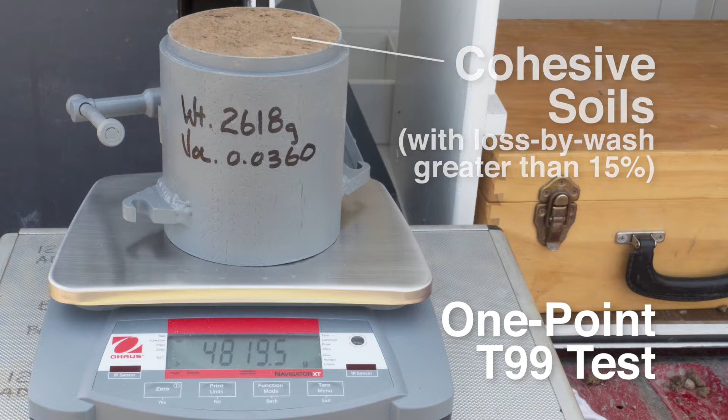The 1-point T-99 test is the primary test used to determine the maximum density of cohesive soils, which we know are those soils which have a loss by wash greater than 15%. This is a Michigan adaptation of the AASHTO T-99 Method C modified test. The modification to the AASHTO test procedure is described in the Michigan Test Method MTM 404.

The 1-point T-99 test uses the following equipment: a Proctor mold with a detachable collar and base plate, the pounding block, a spoon, a 1/4-inch screen, a sample pan, a 1-point T-99 chart, a strike-off bar, water jug, and a 5.5-pound rammer with a 12-inch drop.

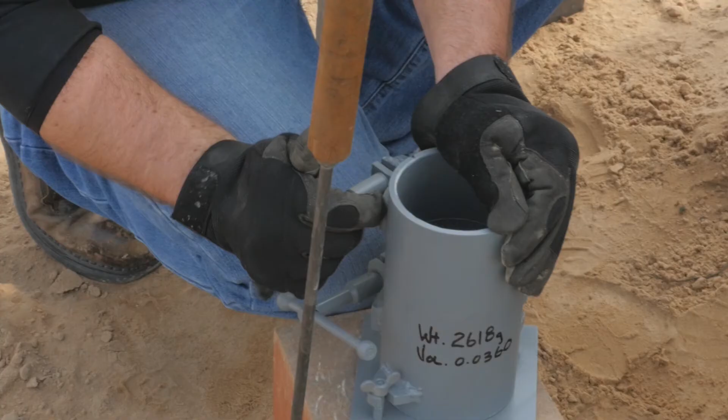The volume and weight of the mold are written on the outside of the mold. On Form 0582B, you will write down the volume of the empty mold in column C. In this case, the volume is 0.0360. In column E, you'll write the weight of the empty mold. In this case, 2,618 grams.

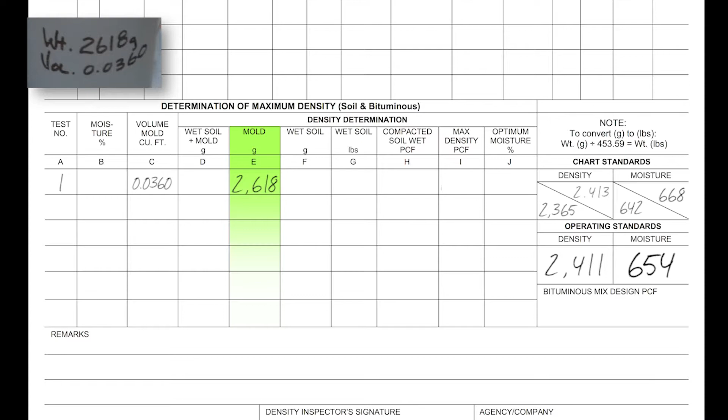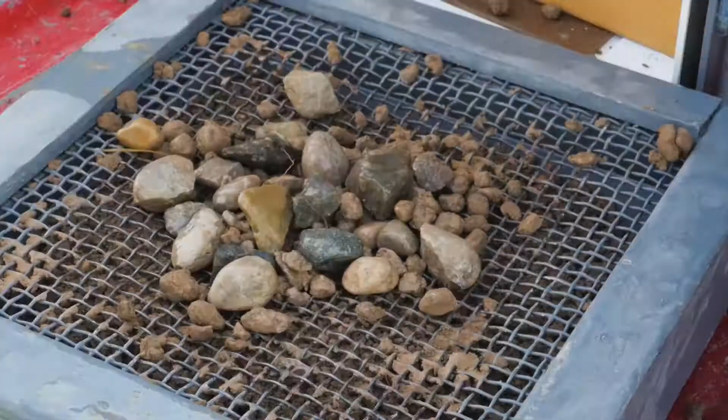The material used for determining the maximum density is taken from beneath the in-place test. Because cohesive soil is normally blocky, it needs to be run through the 1/4-inch screen before the test is run. Any stones left on the screen need to be inspected for size. Stones larger than 1 inch should be discarded and replaced by smaller stones of an equivalent weight. Incorporate the stones less than 1 inch back into the sample and mix it up.

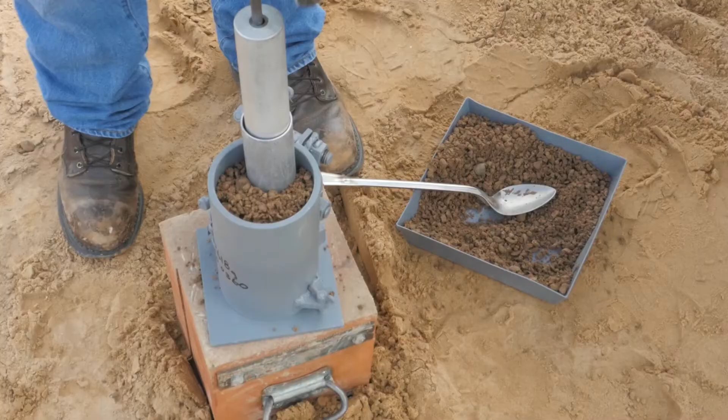Before you start your test, there is something you must remember that is very important. As only one mold will be pounded, it is important that the soil has a moisture content between optimum and 4% below optimum. Optimum moisture is the moisture content at which you can obtain the highest maximum density with a given amount of effort. As you have no idea what the real optimum moisture is before you run the test, there is a simple test that the inspector can use to see if the soil is within the approximate required moisture range.

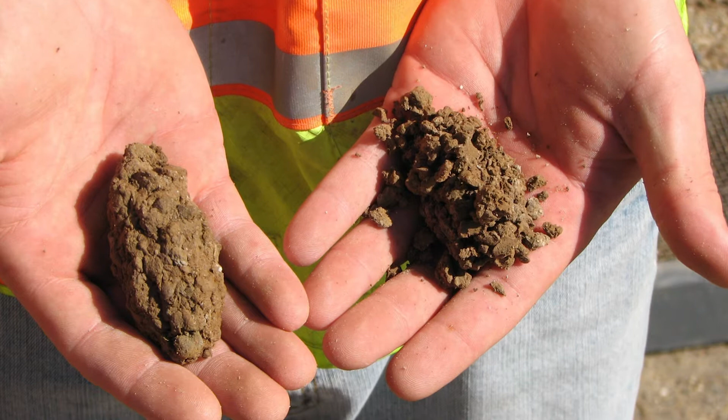Take a handful of material and form a hand cast by squeezing it in your fist. The cast should hold firmly together, but still be able to be broken with a little effort. If the cast crumbles too easily, water should be added to the sample. If the cast molds very easily, like modeling clay, it is too wet and needs to be dried. Whether drying or adding moisture, be certain to screen the soil after to be certain the moisture is well distributed throughout the sample.

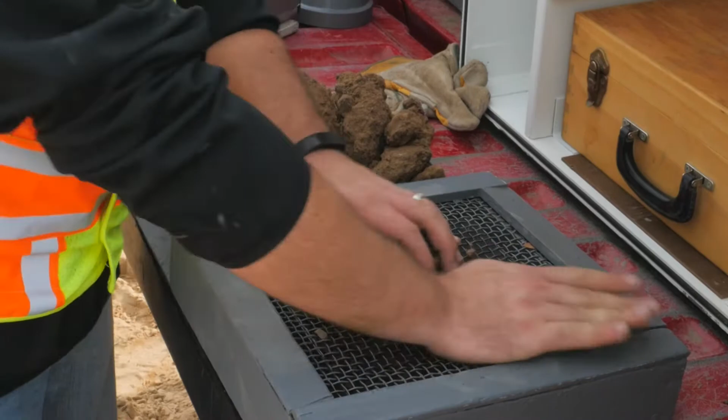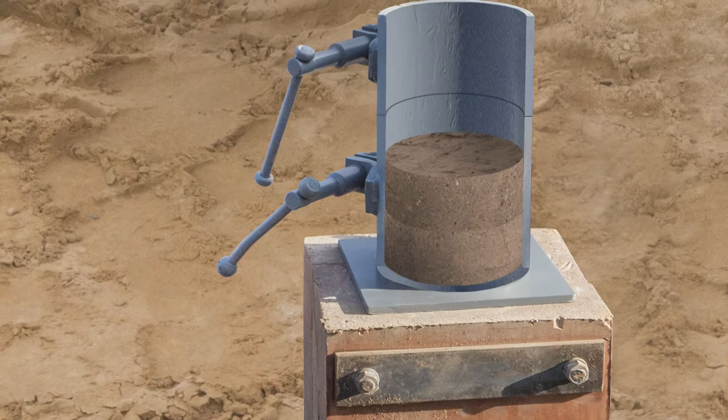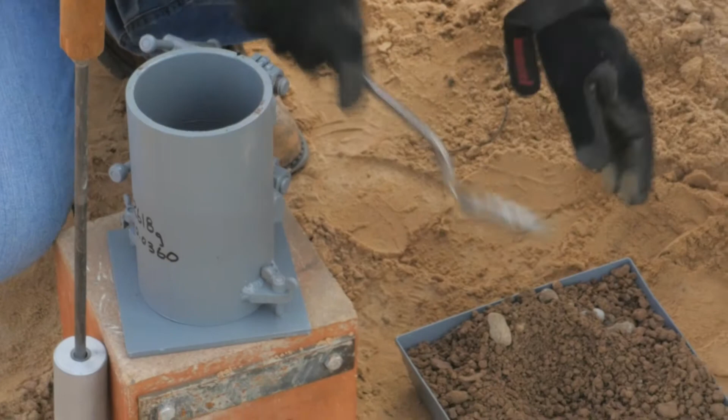Make certain the pounding block is on solid ground. The mold should be tightly screwed to the base plate and the removable collar tightened to the mold. The mold will be filled in 3 equal lifts, with each lift being compacted by 25 blows of the rammer. Put enough material into the mold so it will be 1/3 full after compactive effort. A little field experience will show you approximately how much to use on each lift.

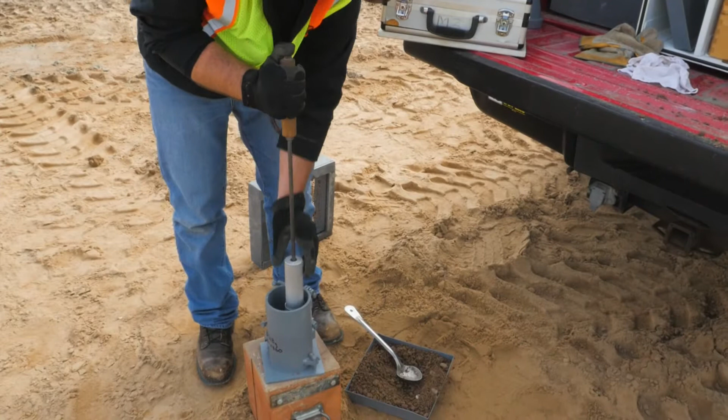Holding the rammer perpendicular to the mold and bringing the sliding weight to the top, allow the weight to freely drop. Repeat this 25 times. Be certain only 25 blows are used. Make sure the 5.5-pound weight falls the full 12 inches. While compacting the soil, the rammer should be moved around the soil surface in the mold to obtain uniform compactive effort on the layer of soil. It is important that the rammer be held straight and the weight dropped freely. Since this is a standard compactive effort, any increase or decrease in the effort may affect the test's accuracy.

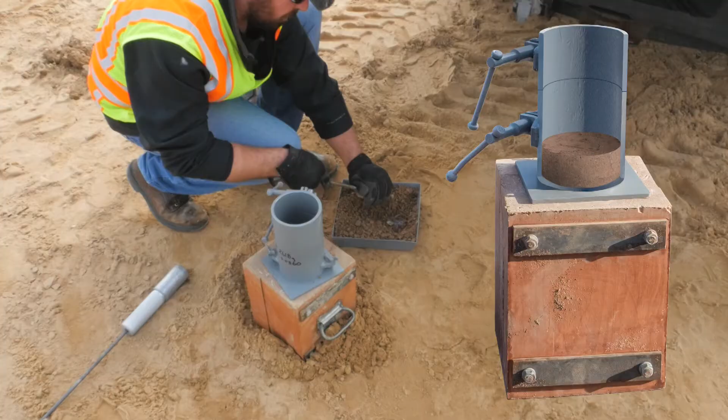A second layer of soil is added, filling another 1/3 of the mold's volume after compaction. This is also compacted by 25 evenly distributed blows. The third and final layer is then added, including enough soil to extend above the mold a 1/4 inch to a 1/2 inch after 25 compactive blows. This graphic illustration gives an idea of the appearance of layers, compacted by 25 blows per layer for a total of 75 blows.

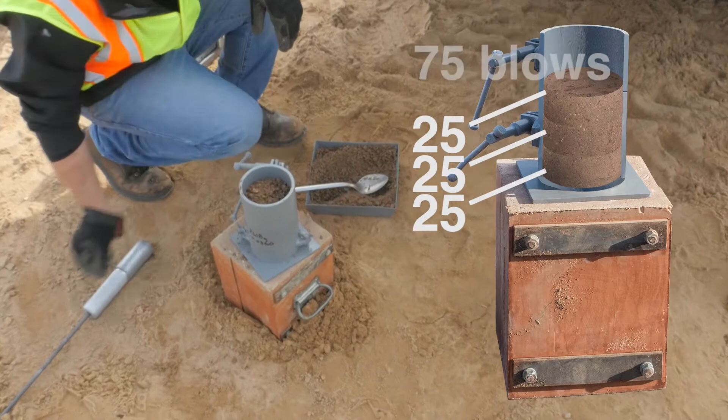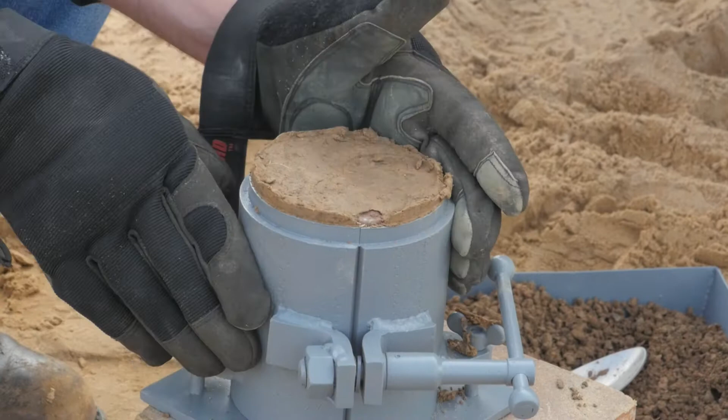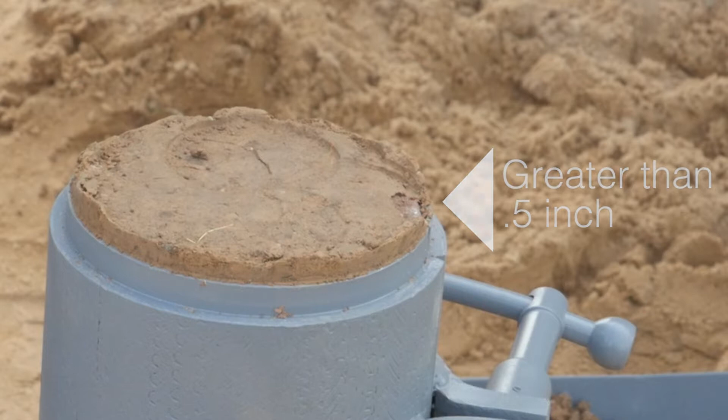When removing the collar, loosen the bolt and twist the collar before lifting straight up. This will prevent you from accidentally pulling off the last layer. After removing the collar, you want the soil to extend out of the mold a 1/4 inch to 1/2 inch. If you are too low when finished, you must start over. If the material is above the 1/2 inch, you may use the mold for this test if you are pressed for time, but you must do another at your next in-place test location.

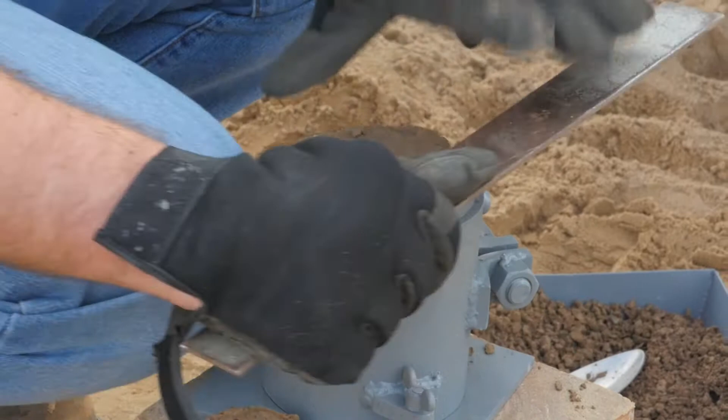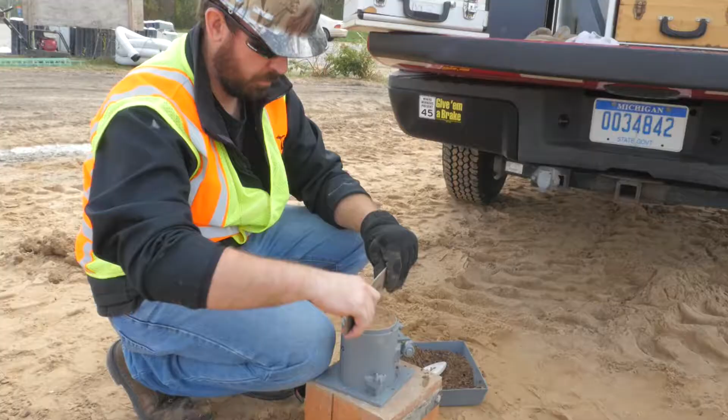The soil is then struck off with the strike-off bar. Don't try to cut the soil off with only one cut. Shave around the edges and work towards the middle. To keep from bending down, you may move the mold to the tailgate of your truck when using the strike-off bar. When you think you're close, use the sharp edge of the strike-off bar and make an X on the top of the mold. If you can see lines, keep working at it.

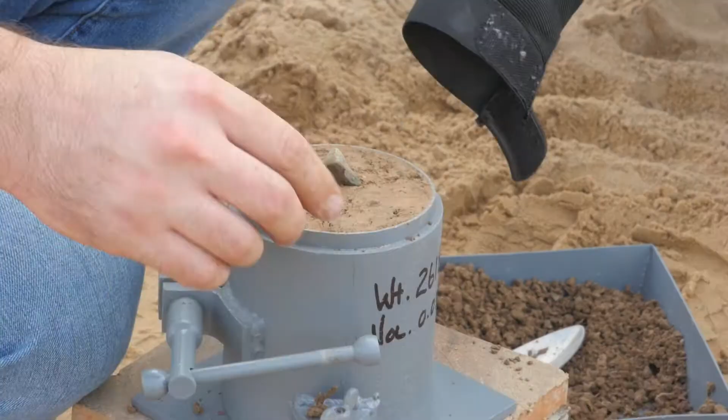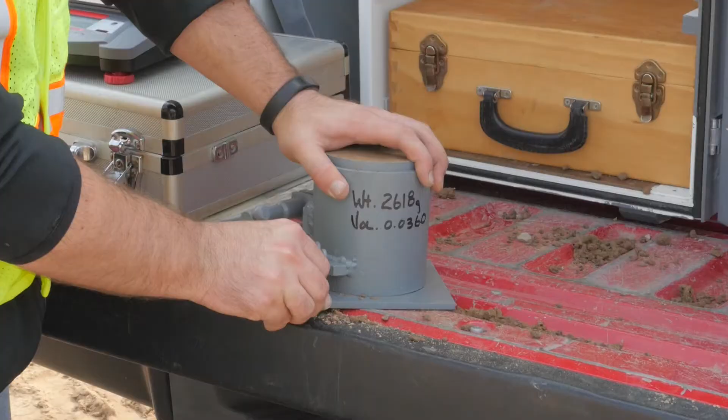If you encounter a stone that is sticking out slightly, use the blunt end of the strike-off bar and pound the stone into the soil the rest of the way. If you encounter a stone that is sticking out more than halfway, remove the stone and replace the void with the fine soil shavings that you just shaved off. This is showing what the mold should look like after you're done. It should be relatively free of voids, smooth, and even.

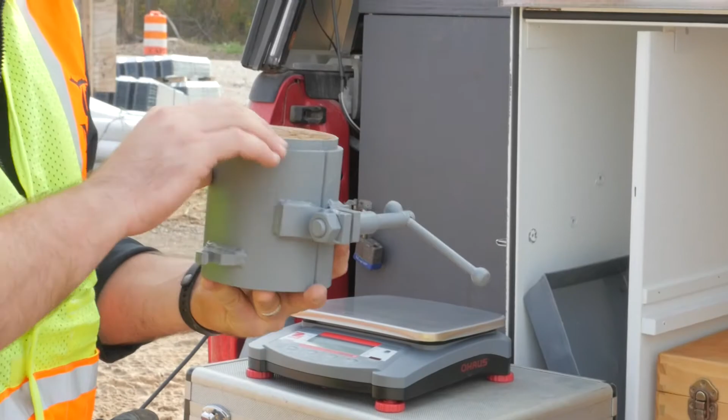Remove the mold from the base plate and weigh the sample on the scale. Make sure your scale is level and the mold is centered, and record to the nearest gram on form 0582B. Complete computations through column H, compacted soil wet.

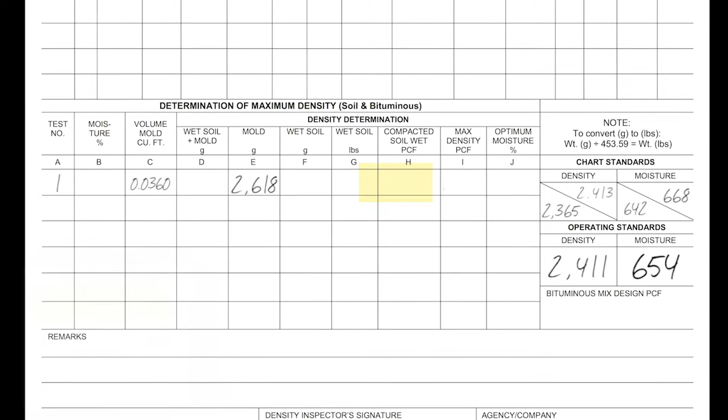First we subtract the weight of the mold in column E from the weight of wet soil plus the mold in column D. The result is recorded in column F, wet soil. In this example, 4,820 grams, wet soil plus mold, minus 2,618 grams, the mold, equals 2,202 grams, wet soil.

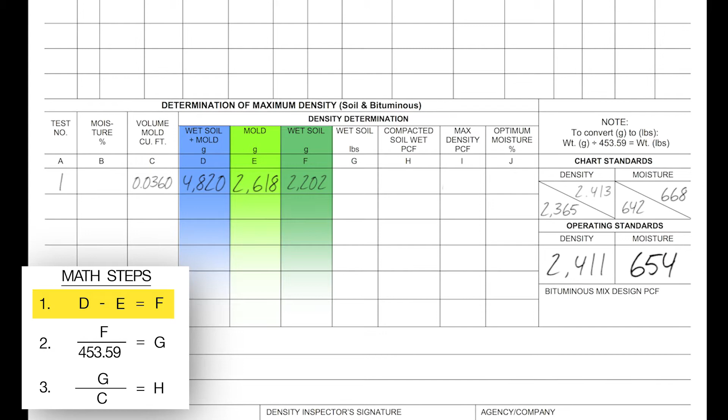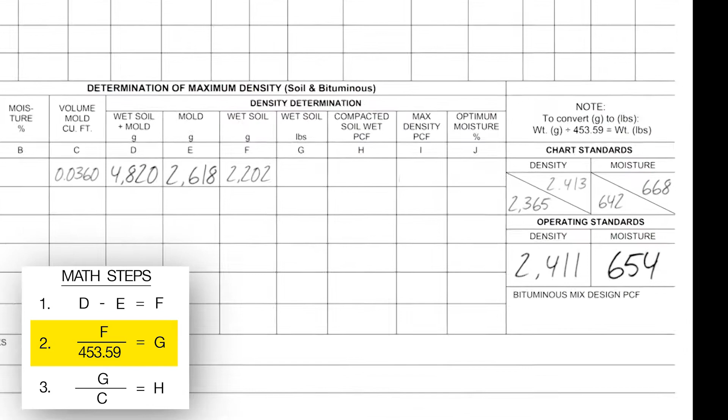Next we convert the wet soil weight in grams, column F, to pounds by dividing by 453.59. Formula located under Note on the lower right side of form 0582B, and record in column G, wet soil in pounds, to the nearest hundredth. In this example, 2,202 wet soil in grams divided by 453.59 equals 4.85, the wet soil in pounds.

Then take the wet soil in pounds, column G, and divide by the volume of the mold, column C, to get the compacted soil wet, PCF, in column H. Record to the nearest tenth. In this example, 4.85, the wet soil in pounds, divided by 0.0360, the volume of the mold, equals 134.7.

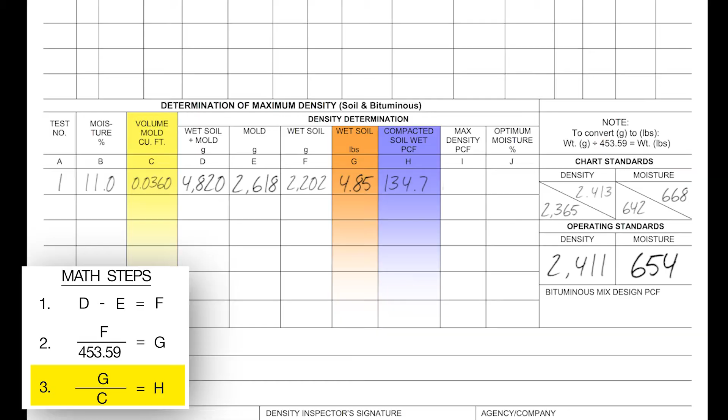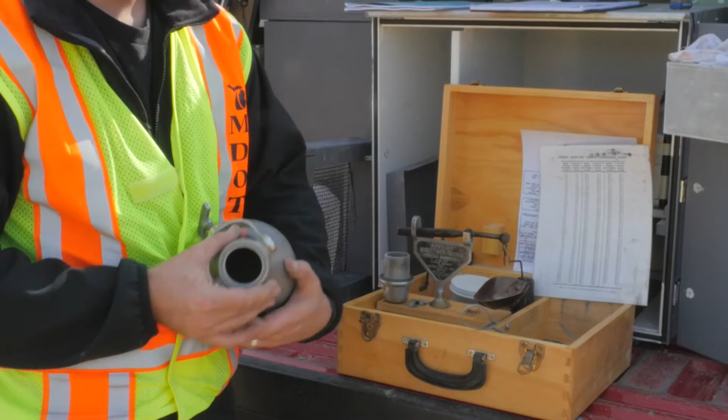If the material has been manipulated, the speedy is required to figure out the moisture percentage. When going through the speedy test, gently roll in the steel balls. Loosen the mold to remove the sample. After removing the sample from the mold, the sample can be broken into 3 equal layers. Use the center portion to get a sample from. Cut the center portion into a pie shape and run enough material through the screen to obtain a moisture sample.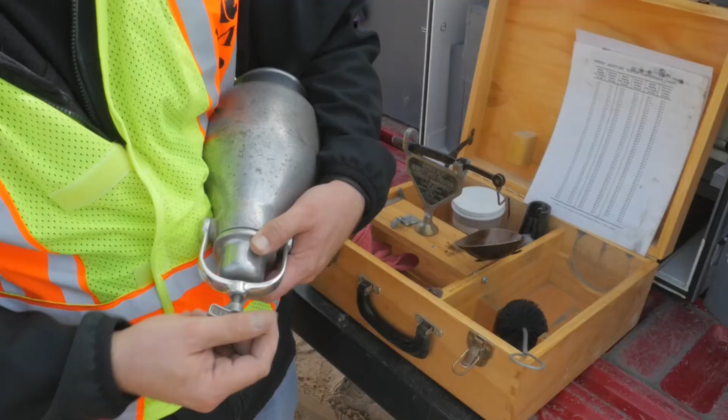As this is a cohesive soil, or a soil with a loss by wash of greater than 15%, we will use a half sample. After tightening the top screw, rotate and read until the needle stops moving. By definition, the needle stops moving when you have 3 consecutive readings that are the same.

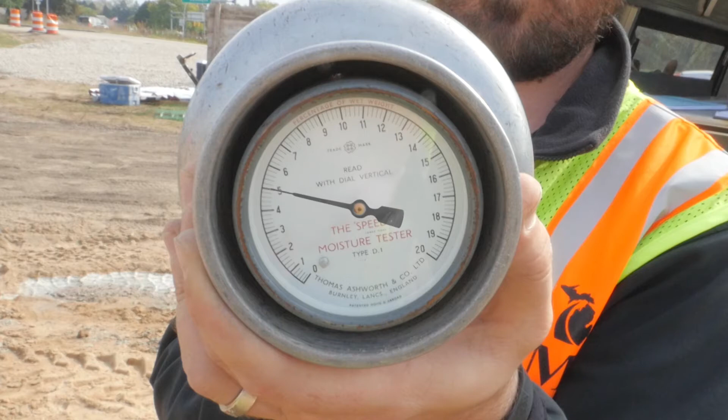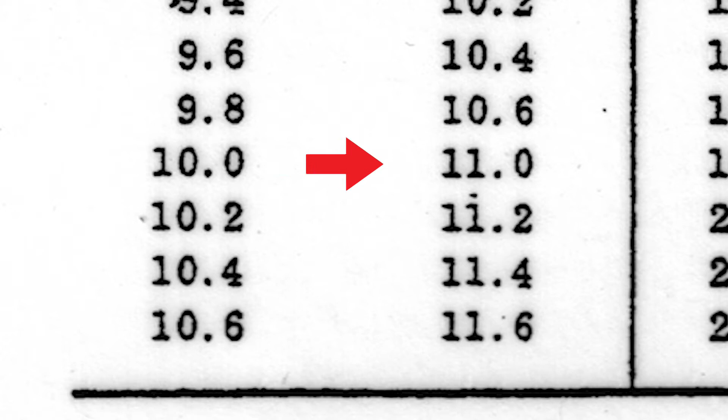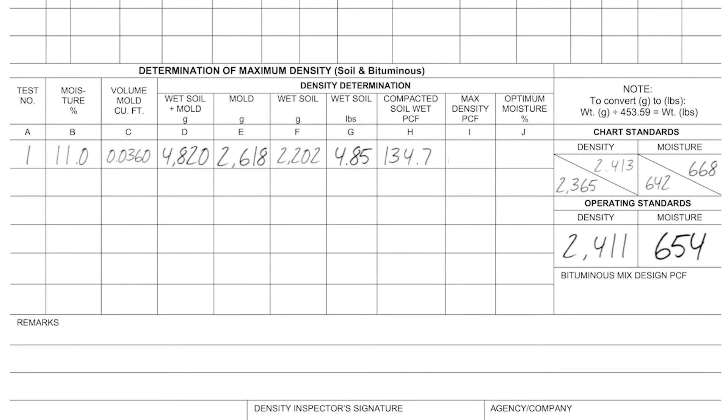Take the dial reading. In this case, it is 5, and as this is a half sample, double it to get 10.0. Find the 10.0 on the conversion chart. Follow it across to find the oven dry moisture content percent value, which in this case is 11.0. Record the oven dry moisture content of 11.0 in column B, moisture percent, of the form 0582B.

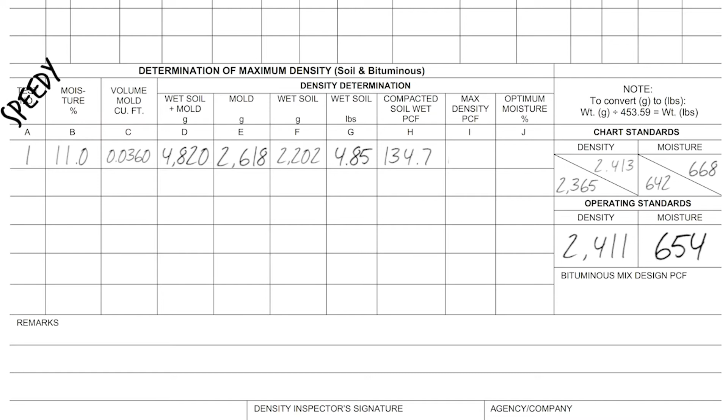When a speedy is used to obtain a moisture percent, you need to indicate with an S next to the moisture percent value and circle the S. Or you can also write out speedy off to the side. This indicates that the material was too wet or too dry from the nuclear gauge reading, and you had to manipulate the soil by drying or by adding water before pounding your mold.

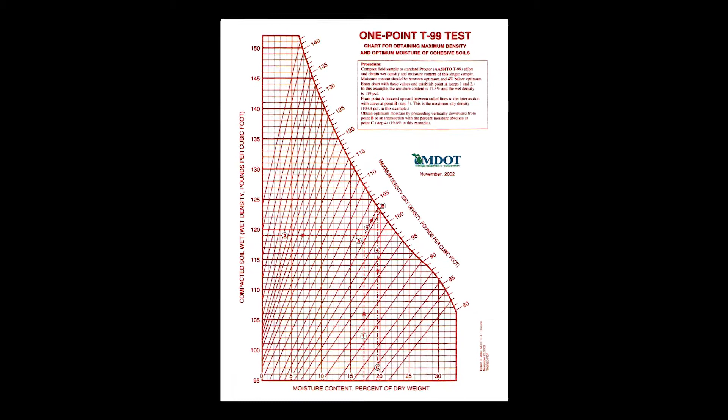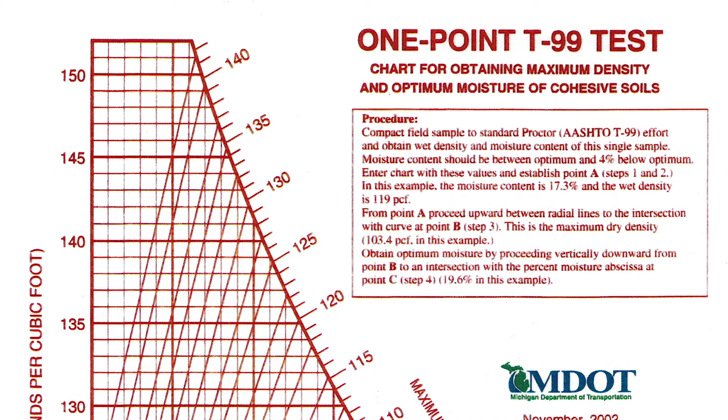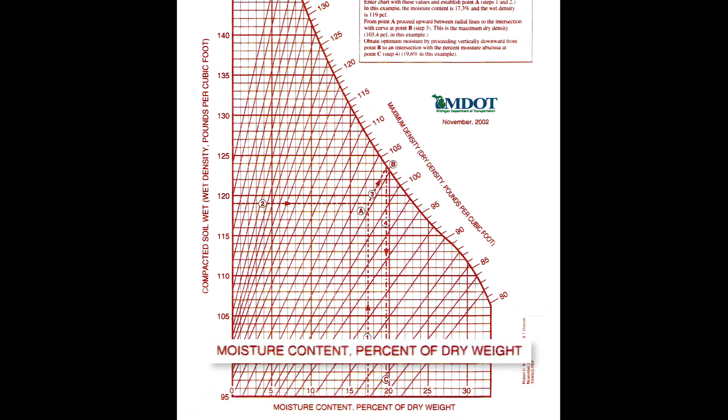Now you have 2 required values, moisture percent and compacted soil wet, to take to the 1-point T-99 chart. This is the 1-point T-99 chart used to obtain maximum density and optimum moisture for cohesive soils. Compacted soil wet values are located along the vertical axis, and moisture content values are located along the horizontal axis. Maximum density values are along the curve.

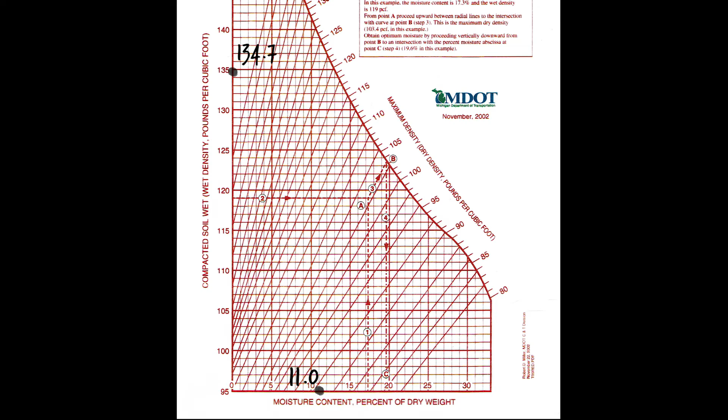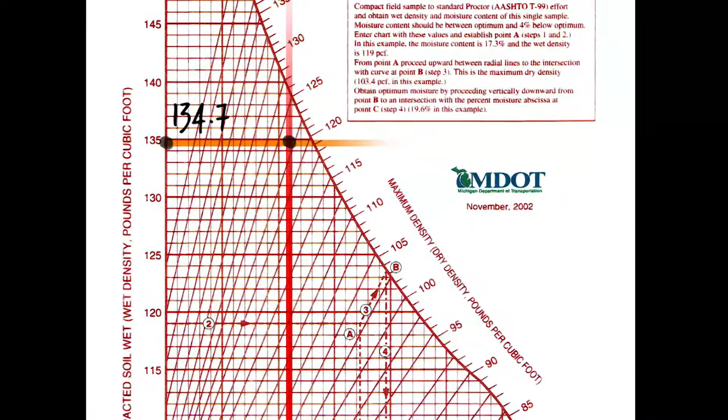First, locate your moisture content value, 11.0, along the horizontal axis, and compacted soil wet value, 134.7, along the vertical axis. Proceed upward with the moisture content value, and proceed to the right with the compacted soil wet value. Where those two intersect, make a point. Next, from this point, project a line diagonally, roughly parallel to the guidelines, until you meet the maximum density line.

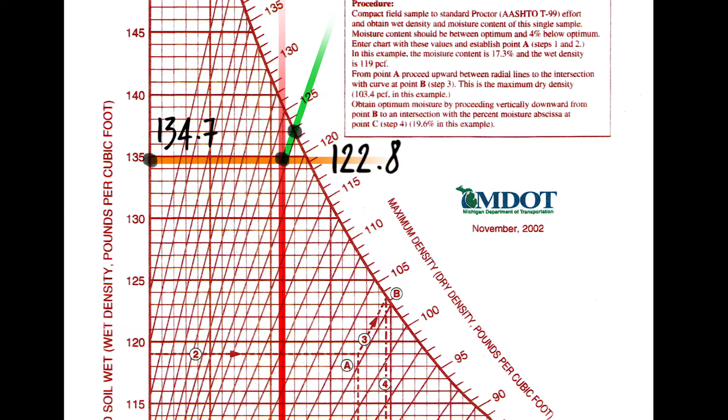This point will give you the maximum unit weight, or maximum density, for this test. In this example, we come up with a value of 122.8. Read the value to the nearest tenth. Record the value of 122.8 in column I of Form 0582B. This is your maximum density value for the particular material you just tested.

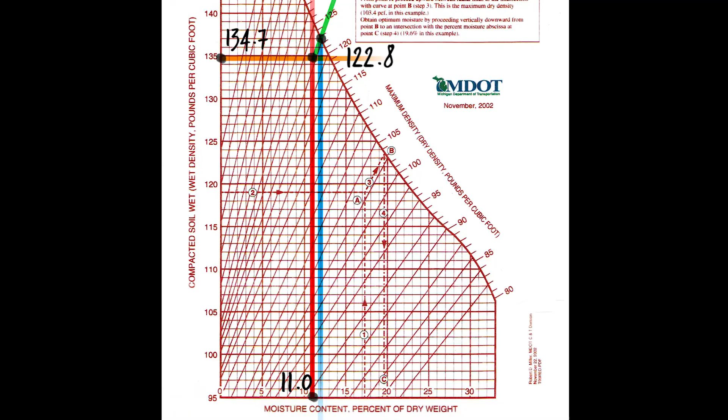Finally, we proceed vertically downward from our point at 122.8 to the intersection with the moisture content axis. This value gives us our optimum moisture content, which is 11.7 in this example. Record the value of 11.7 in column J of Form 0582B. This is your optimum moisture value of the particular material you just tested.

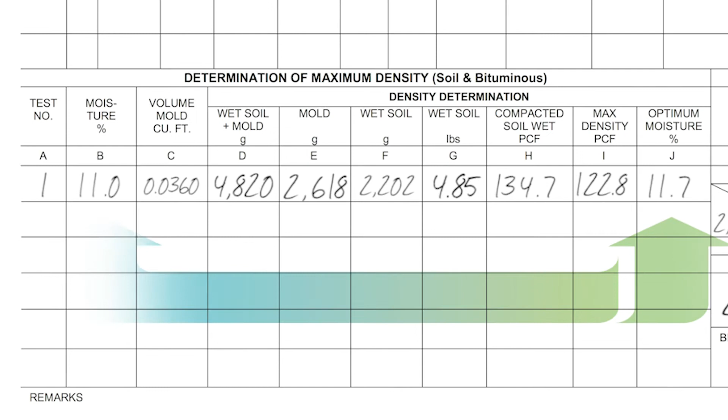Now that we have our optimum moisture percent, we can compare it to our percent moisture. This percent moisture has to be between optimum and 4% below. In this example, our optimum moisture is 11.7%, so our range for percent moisture is 11.7 to 7.7. Our percent moisture is at 11.0, so this maximum density is valid.

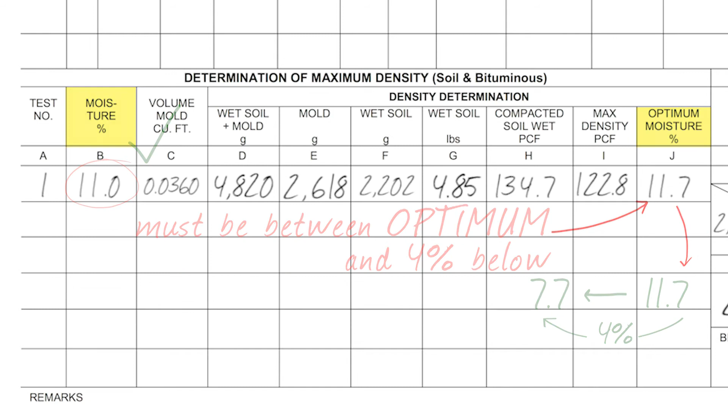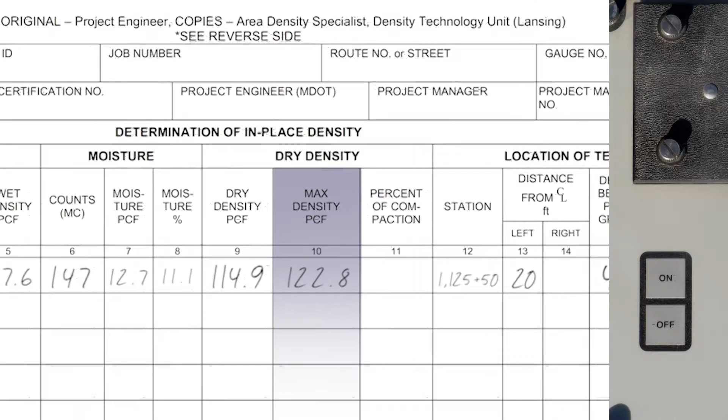Because this test is valid, we may now carry the max density of 122.8 upward to column 10. This is the number that will be entered into the Troxler 3440, the Proctor value, under the Proctor-Marshall button. When that is done, the gauge will compare the maximum density with the dry density to give a percent of compaction. In this case, it was computed as 93.7.

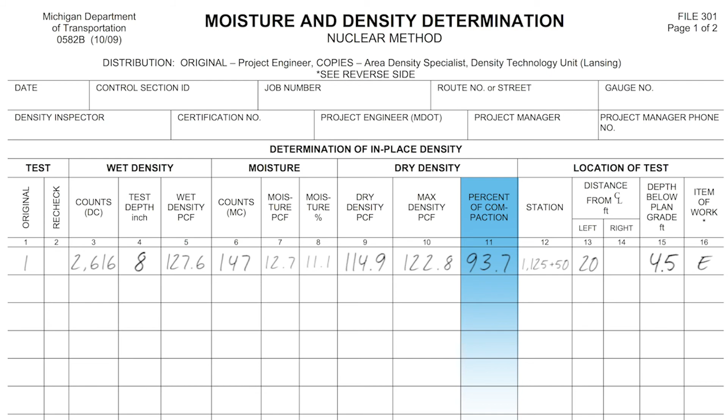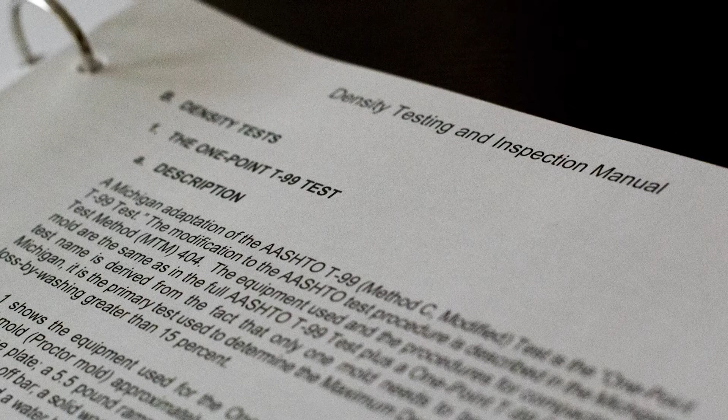This ends the section on the 1-point T-99 test. You may turn to the section of the density testing and inspection manual entitled The 1-point T-99 Test. Review the material if you desire.